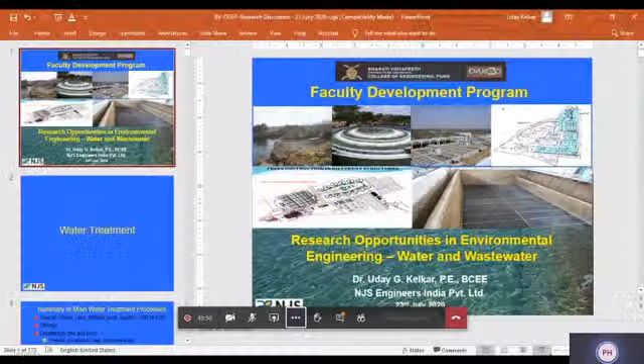Essentially, I want to focus on two sides: water first, then wastewater, and then focus on different aspects of water - the design, the issues that can lead to a variety of processes - and then what's out there for wastewater treatment systems.

What we need to look at is how we, as engineers and researchers, have come up with some of our projects and what future tasks we need to consider. Some slides you might see have come from textbooks or from my interactions - if they're not relevant we'll skip them and go more into detail.

What you see on the first screen is basically a water reservoir on the left-hand corner, then a cascade aerator and treatment plant. On the right-hand side you see the design of a plant.

I'll talk about that soon, but it's quite an interesting project where doing research together with the contractor was really beneficial. The slide at the bottom is a brand new plant we are building as engineer and designer, which Suez is constructing.

This is going to be the largest plant in India, or maybe Southeast Asia, at 564,000 cubic meters per day. This plant is in Delhi.

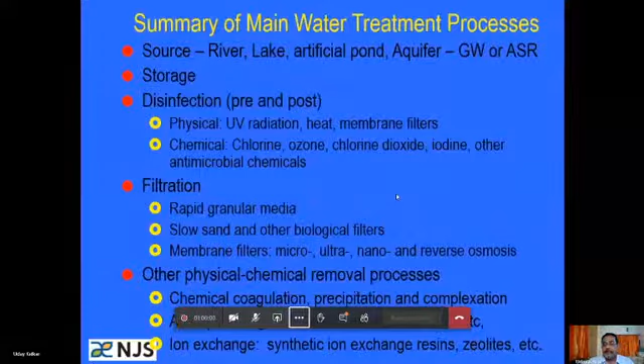I'm going to skip this because it's a standard slide.

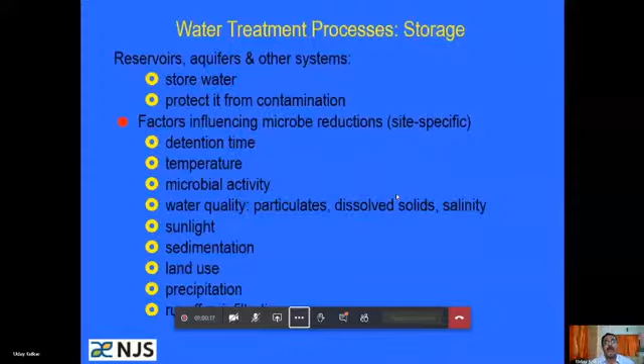Because of that, a good amount of residence time was created within this reservoir. At the intake location for this large 500 MLD plant, or 500,000 cubic meters per day plant, the actual water quality coming into the intake was much more superior.

What happened was, because of reduced operations, reduced chemical usage, and reduced disinfection, this particular reservoir, which they had land available for, started being used as a toning reservoir. That attenuation reduced the incoming turbidity, TOC or total organic carbon, and other contaminants.

In the next step, when the new project started, they wanted to go directly to the canal rather than into the lake they had created. Because of this assessment, they had to research the water quality and substantially change the treatment processes, treatment units, and operation and maintenance, because what existed earlier was no longer going to be there. So that's a change in water quality.

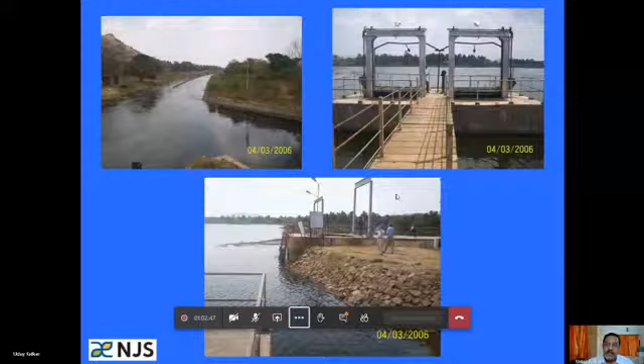So this all happened based on the research that we did in the systems. You could also do these researches. The systems that need to be looked at are the carbon, nitrogen, and carbon phosphorus transforms, leachings from the sediments, and aeration of the sediments, and so forth.

Here's the data that we did, relation between the COD nutrients and the data from the study that we did for one of the plants - total nitrogen, total phosphorus, and limiting nutrient needed to be found out based on the treatment process. You still can continue to look at it.

There is a lot of work that has been done on limnology, and they still continue to do it. And based on now, the relationship between total phosphorus and carbon, total phosphorus and total organic carbon, molecular size reduction and molecular size changes within the nitrogen and carbon, and so forth.

Every lake, every system is different, so one size may not be able to fit all. What you can get is an idea to look at it, where to search, but your solution will be unique for your own processes. Here's the research that we did from the bottom of the sediment on one of our projects.

I'm fortunate that I do get involved in technical design engineering, even at this stage, and also in some research with universities that we jointly do. So I guess it keeps my brain cells active so that in case I'm retired, I can go and do other teaching and anything else. That's just a side note.

So this is what can also be looked at for the limnological side of the way of considering what needs to be researched on the side of water and augmentation systems.

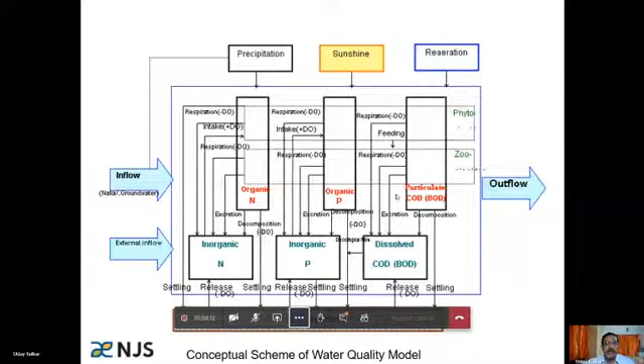And we had to do this. We had to analyze and do speciation of the combination between iron and manganese, and also TOC and so forth.

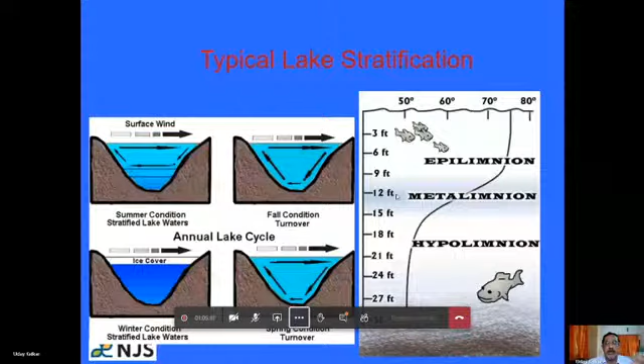So this is when finally an aeration was conducted and designed so that during stratification, if you apply a certain amount of air into the process, it will provide oxidation to the hypolimnetic and metalimnetic water layers, and basically not stratify the lake, essentially increasing the water quality in the process.

There are different types of aerators. This is one we used in Hyderabad, in Lake Hussain Sagar, for developing these - reducing the stratification and also reducing the applied slug of nitrogen and phosphorus coming from the sediments, which were found to be highly anaerobic in nature.

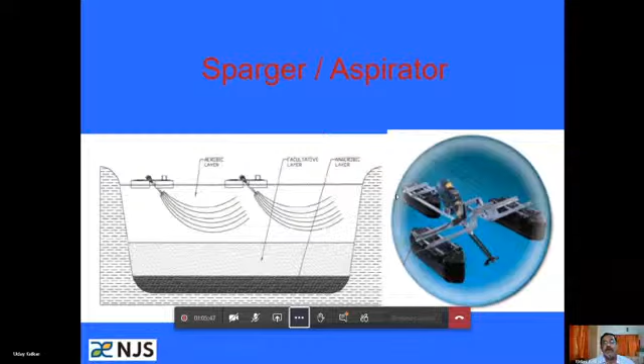I think in Gujarat, and also Baroda and Ahmedabad, they have used this for a similar type of lake restoration. There's another one sometimes people have done in Nainital and other places, where you can put an aeration system through a linkage of pipe and simple air conduits at the bottom, or membranes at the bottom, to have an aeration.

Essentially, it just brings the water up and down and changes it from your limnetic condition to non-limnetic, changes the stratification into normal air mixing. It doesn't disturb your flows or your water levels at all. And it's got an idea that it can go up and down in height.

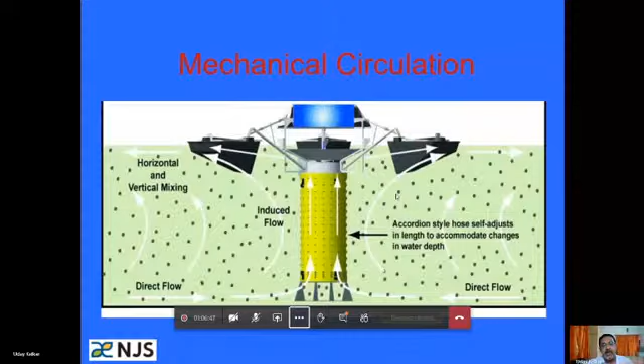So if the limnetic conditions are in the case of hypolimnion, and the lower side of the waters are deeper, you can essentially increase the length of it, if you look at it on the left-hand side.

They have used it, and we actually went and visited this at Lake Warragamba Dam in Australia, where if you look at it, these were solar powered. The same system was on solar power, where the solar power was providing enough energy - less than, I think, 5 kW or 2 kW range pump systems.

What they were having was a lot of water coming from non-point source pollution into Warragamba Dam, a lake being used as a reservoir for water supply to the city of Sydney. Because of this non-point source pollution, they were seeing algal growth in blooms during certain times of the summer.

That was creating a lot of problems in the treatment plants downstream used for the city of Sydney. If you've worked on these plants, you know that when algae comes, it has long chain species. You need to have oxidation, otherwise if you add a coagulant up front, it will just wind up into the process, everything will float, and create a messy system. It will never settle down.

So by doing aeration with the solar-activated panels, they were able to reduce a considerable amount of algal blooms coming into the plant and save costs.

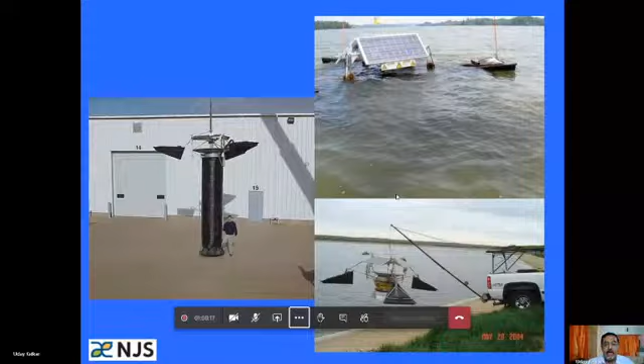So this is a process. This is just your standard conventional plant, as I talked about. We talked about the physical process. I'm going to skip some of this.

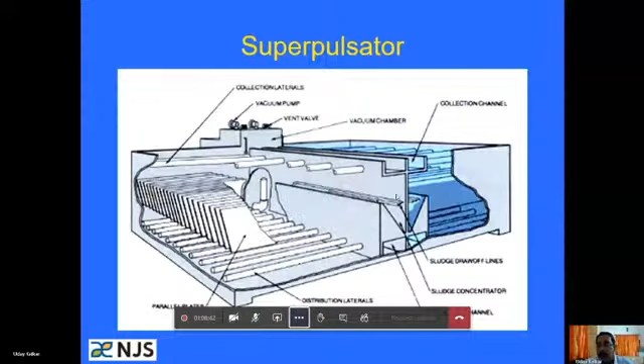Can you hear me? Yes sir. Okay, because that's another issue we have with the connection speed we were at. Now I'm getting connected again, I have to redo this. Just now? Hello? Yes, hello sir. Yes sir, you are audible. Okay, great.

So then talking about this, another problem I also do research on is called Actiflo. Actiflo is a solid contact settlement process. It was kind of unique in that if you add very small particles that act like a seed.

Sitting into your treatment plant, it actually reduces the footprint of your sedimentation basin. We did this pilot first when I was in the US, and we tried to do it here in India, but the cost was substantially higher to begin with.

But essentially, it's not a new seeding process. You might remember that at times people used to add a small amount of sand particles, or small amount of soil particles, to the treatment process for coagulation. That's exactly what this was, Actiflo given a brand new name by US Filter at the time.

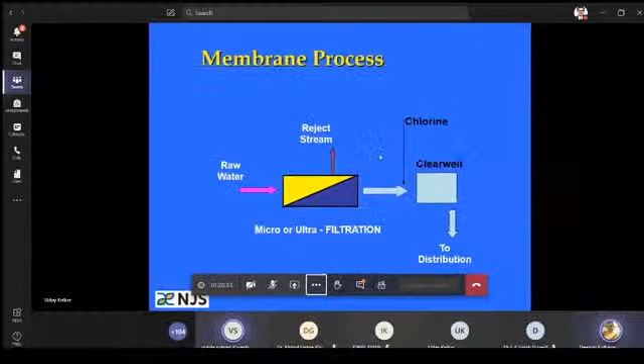Yes sir. There is some disturbance, I'm getting a motorcycle noise. Can you hear now? Okay.

Then the second point is desalination, where you're using systems across osmotic pressure and reverse osmosis.

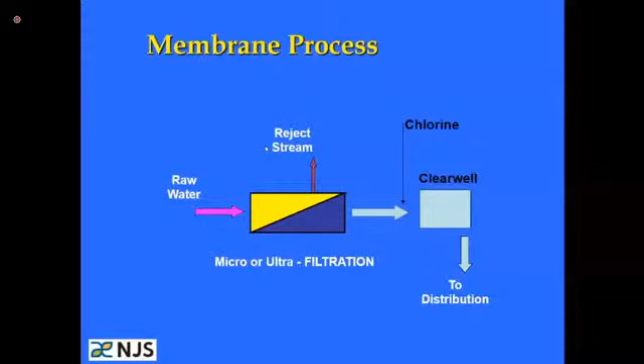Wow, okay, thank you, sir. Oh, okay.

Now I want to talk about desalination, where basically you use the reverse osmosis process, RO. If you look at the earlier slide, the last one is the desalination or RO process.

There's a lot of work now on the normal process in trees, where roots go down and take up water through osmotic pressure, for example a coconut tree taking water from the bottom of the soil. The other way around, what we do in membranes is use reverse pressure so that the salt is retained and the water is cleaned.

But it's a very costly process. It requires high pressure pumps and high osmotic pressure. The recoveries are not more than 50%.

So new research is happening in terms of what is called forward osmosis. What we are used to doing nowadays is reverse osmosis, putting a reverse pressure and trying to separate out salt and the water content. Now FO has been developed, but not yet to the point that it can be used for conventional drinking water.

It's being used a little on the industrial side. The issue is you need to use a chemical, for example ethylene glycol or something of that nature, to separate the salt and the water content. It's still being formed, not completely finished in the process.

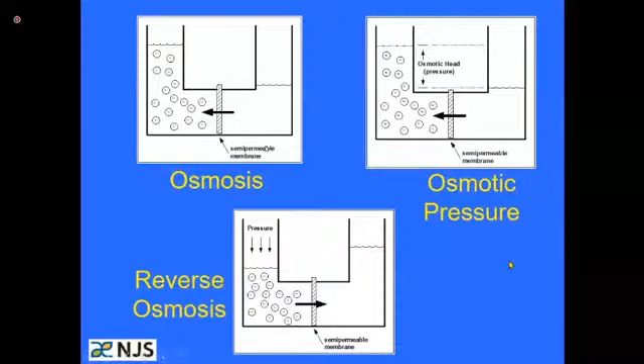Another point of research is energy generation within the RO process, because in seawater desalination your recovery is only about 50% or 45% in actuality. You use a lot of energy and have a lot of waste energy going in. You need to recover that energy so substantial energy can be recovered through the process. There's a lot of research happening here, you could look into that in the systems.

Another type of research is the use of bathymetry in dispersion and disposal of the reject, as well as the intake, because you don't want to put the reject and the intake at the same location or in close proximity to each other. Otherwise you'll be in a circular system where your plant will essentially fail, because you're putting dirty water back into the intake location and the intake is pulling it into the process. So you can do mathematical modeling of the systems to determine where your intake and discharge points will be, and how dispersion is going to happen within the seawater.

What is the strength of dispersion? What are the waves and patterns in the area that need to be accounted for? And we do this in large scale plants.

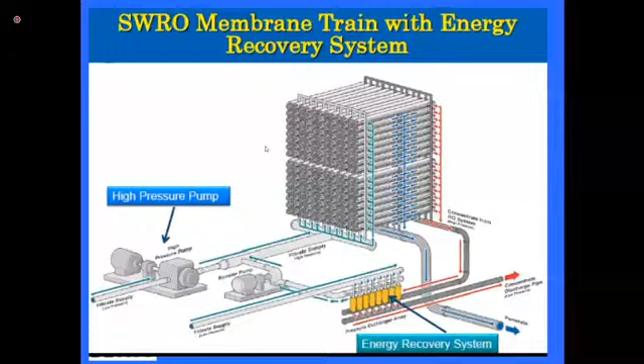We're actually doing this, or going to do this, in one of the largest plants in India. It's under the design stage right now for Chennai Metro, which is basically a 400 MLD product water plant. The intake line will carry almost 900 MLD capacity water for desalination, to the tune of 30,000 to 35,000 milligrams per liter of solids or salt.

Here's an example of why we need to look at research and the thought process. This is data from a plant in the same area showing influent and effluent TOC, total organic carbon. We suspect there is an issue with how TOC is analyzed, whether it's analyzed in actuality using a TOC analyzer, like a Shimadzu, or using a COD analysis and converting COD into organic carbon. That's why you're not seeing any change between the inlet wastewater and outlet.

So this is another way of looking at desalination. Why? Because if the amount of contaminants, for example TOC, total organic carbon, is not reduced, then you have higher fouling characteristics of the RO membrane. It may be anybody's membrane - it could be DuPont's, it could be Nitto Denko's.

But essentially, RO fouling will be a substantial issue. And if RO fouls faster, you're increasing the changeover of RO membranes, which increases the cost. So this all boils down to cost and operational issues.

I just threw in this slide to give you an idea how the cost of RO systems works. Typically power is 26%, which is the highest in the operation process. Construction is 31%, but that's spread over the number of years of the plant. Pre-treatment, intake, and discharge are also there. In operation, 15 to 30% is O&M cost, 35% power, and 40% is capex and indirect cost.

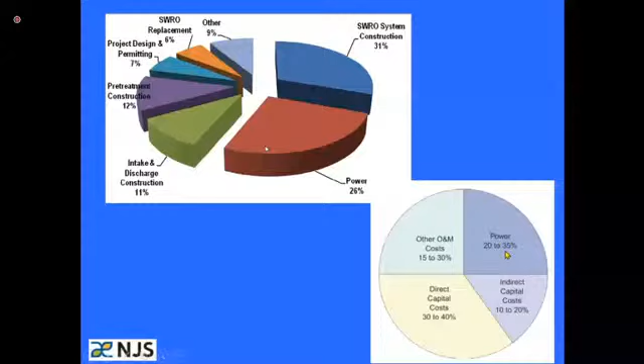I'm going to talk about the third portion, which is disinfection. We're interested in disinfecting the water for use, whether it's recycled water or treated wastewater getting discharged into the lake, the river, or anywhere else. I'm going to start adding in the viruses, coronavirus, or any other viruses that exist or would exist in the future.

Here's an example of THM, trihalomethane formation potential. You can use coagulation, clarification, or enhanced coagulation. One of my PhD work was looking at enhanced coagulation at different systems, dosages, and sizes of TOC during my early master's and PhD level. Essentially, you could reach an asymptotic condition where no matter how much coagulant or change of systems you do, you won't remove any more additional TOC or organic carbon coming in. So essentially you've reached the point of no return.

You've got to do something different to reduce THM formation. Chlorine is obviously used as a primary disinfectant, but it adds trihalomethane formations or trihaloacetic acid formations. If you consider ozone as one of the options, ozone converts not only bromide to bromate, and bromate gives you dibromo chloro, because chlorine is still used as a secondary disinfectant. So you get dibromo chloro, bromochloro, and combinations thereof. Also, ozone converts acetic acids from your TOC, so you get haloacetic acid, halo organics, and halo halides.

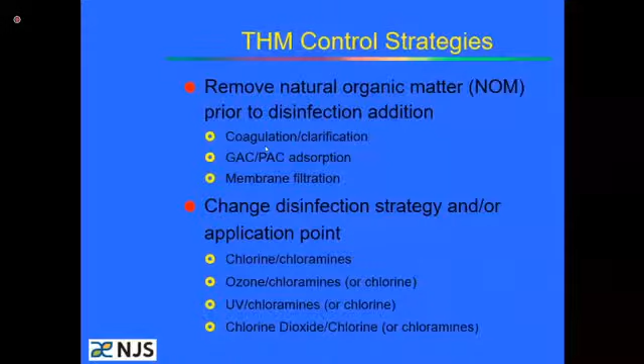Secondly, it also has some issue with bromine and iodine in the water. If you have iodine and bromine coming into your raw water, it will convert iodine into iodide, and it will give you pink water. This happened to us when we were operating a plant and didn't notice how much chlorine dioxide dose we were putting in. Accidentally the dose went up to 2 milligrams per liter, and boom—next day everything was pink in the system.

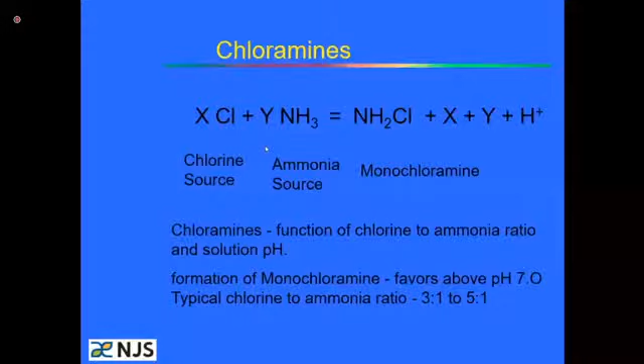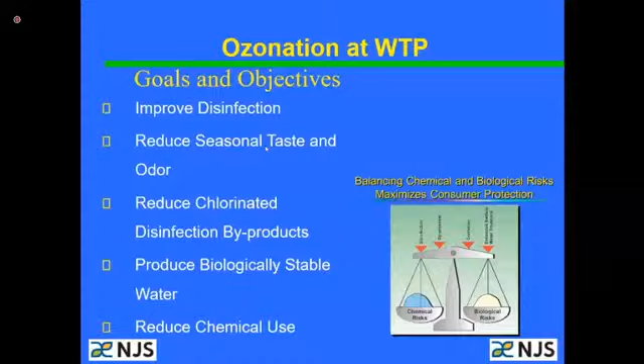Hello sir, yes sir. Is it necessary to change the slide? I see the reverse osmosis slide in front of on the screen. No sir, you have to share the slides so we can understand what you speak. Sir, slide change hota hai. There is a delay in slide change that I can see. Right now, sir, almost slide change hoto, sir. If you don't have it, just tell me, I'll stay longer on that slide. It may be possible that I'm talking about the next slide and you're getting an earlier slide in front of you - that's possible. So just let me know, I'm here to help. Okay sir, no problem, thank you.

Now I want to talk a little bit about ozone. Keep in mind, chlorine can be brought as a gas, stored in cylinders and applied. Chlorine can also be brought as a liquid, as hypochlorite. Again, you need to consider what level of hypochlorite you're going to bring - 10%, 15% solution, or combinations between 10 to 15%. Because the longer the chlorine solution as hypochlorite stays in your silos or holding tank, it will create an issue of chlorate-chlorite formation and degrade. It will change your dosage requirement, because your pumps will be designed based on the percentage of hypochlorite solution you're going to use. This is especially true in areas with large temperature variation between day and night, especially in summers - Rajasthan and Delhi are classic examples, with very high daytime temperatures that could create chlorate-chlorite issues. In moderate temperatures, there's no variation issue with using chlorine.

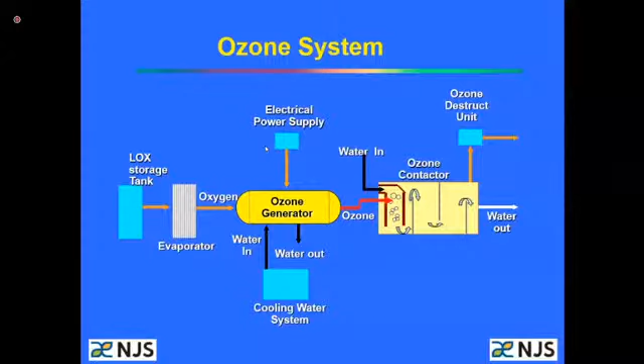So ozone looks beautiful, wonderful, lovely, but it has its own things that need to be looked at and considered. Here's a slide I'll show you - we can talk later in detail if somebody wants more analysis. You can look at your ozone percentage area, what percent ozone by weight you can get, what amount of energy is required, and how the combination needs to be considered in your system.

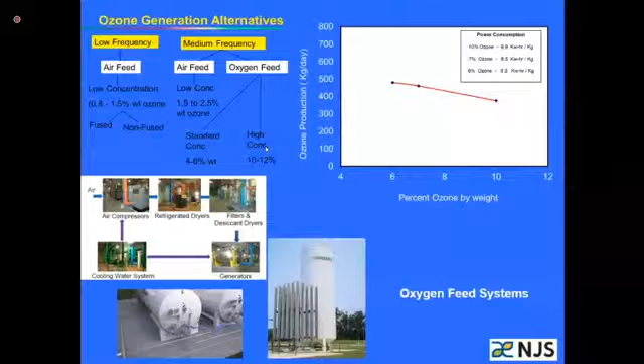Here's a slide showing ozone generation. Essentially, oxygen goes in, you have a high electric discharge into ceramic tubes or ceramic sheets, and then an electrode that sparks. If you go to Google and search ozone generator, you'll see a typical slide like this, but it'll also show a blue color arc around these little holes - that's the corona formation due to energy being sent and ozone being generated in the process.

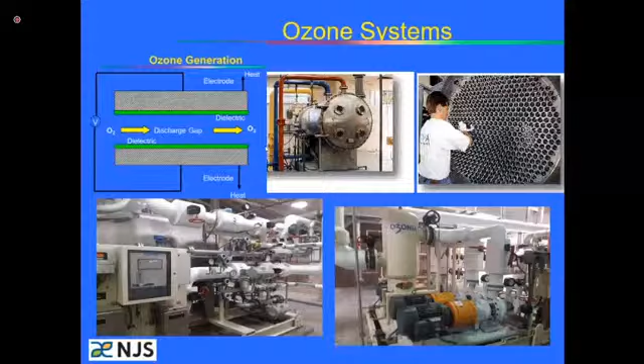Once the ozone is generated, it needs a formation to dissolve back into the water. It's got a standard bubble-type dome system. You could design it - something I was involved in when working with CDM Smith. One of my colleagues, Chris Schultz, developed what's called SVIDT, side stream virtual impact venturimeter, which basically injects here and then goes through the process. It was quite research-heavy work we did jointly with AwwaRF and CDM Smith - there's an opportunity to do that.

As I said, ozone could be used as a primary oxidant. Then you need to look at what to do with your filtration, or ozone could be used post coagulation-flocculation. You need to do work specific to your own water quality and client, because if you have very high organics, large molecular weight compounds, iron, manganese and other organic mixtures, they'll use a lot of ozone up front - a dose going from 3 to 5 milligrams per liter.

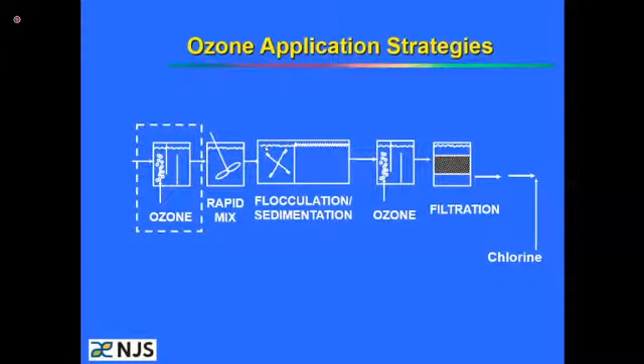But instead, if you use good coagulation processes, enhanced coagulation, remove the organics as much as possible, give better quality water coming into the ozone plant, then you could reduce your ozone dose to about 1 to 2 milligrams per liter - substantially reducing your unit size, operating cost, and system costs, and use that savings downstream. But there are plants where primary ozone is a must, because the quality isn't necessarily that bad, and you can use ozone as a primary disinfectant.

Here's a new process I just got word of from my ex-colleagues about what they're trying to do. Nowadays there's a lot of talk within India, and maybe elsewhere, that the water quality coming from the treatment plant is absolutely great within the GLR. However, when you collect water within the distribution system, they're seeing a lot of variation in microbial contaminant concentrations as well as other byproducts. So what these guys are doing now is using small dosages of ozone to clean up the distribution system.

You can do that with flushing, but flushing takes a lot of water, and you're wasting that water. So now they're looking at using ozone in a modular cart, putting it on a tractor trailer, going into the distribution system and cleaning up. It's a much better way. There's a lot of data available now, and there's an AWWA publication on this too, in terms of distribution system water quality, because that's the issue coming up in India nowadays.

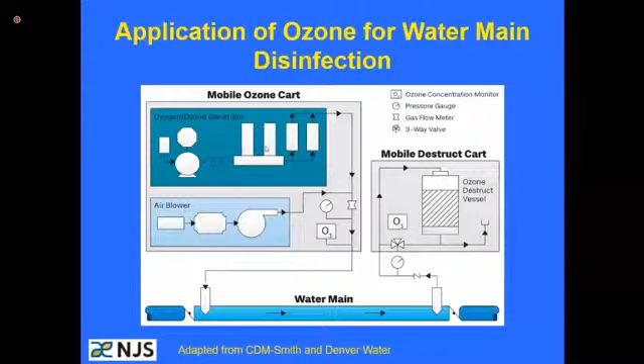But I want to clarify up front that UV, like any other oxidant, does not kill the microbe or the species. It just neutralizes it - basically changes its DNA and its reproductive capacity. If the microbe can't reproduce, it can't infect. That's the premise here. So UV disinfection attacks the DNA process so they can't reproduce. If they can't reproduce, they're non-infectious and can go out - still alive, but non-infectious. I believe that's what's happening with a lot of research now using UV for disinfection against coronavirus in air systems, or on surfaces infected with coronavirus, putting a UV lamp across it.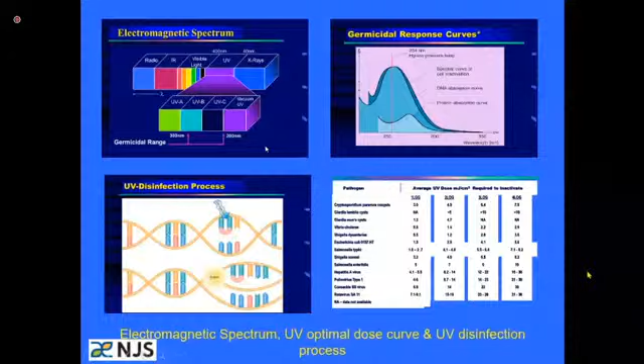The next slide shows work I did for my own research, and also in a lot of plants. There are two types of UV you can use - UV in pipe, or UV in trenches - depending on the application, the space limitations, and so forth. Most of the time on the wastewater side, you use UV in trenches because it's easier and hydraulically controllable. You can install or remove the UV lamp, and accessibility is much easier for an operator.

But for a water plant, you can consider an in-pipe system where you connect the UV to either an individual filter pipeline or a combined pipeline where water from different filters comes together. You need to give enough space for the operator, because they need to change the UV bulbs fitted in there. For example, with an in-pipe system, you need space for the operator at the flange, and enough distance between that flange and the one connecting to your pipe, so removal isn't hindered.

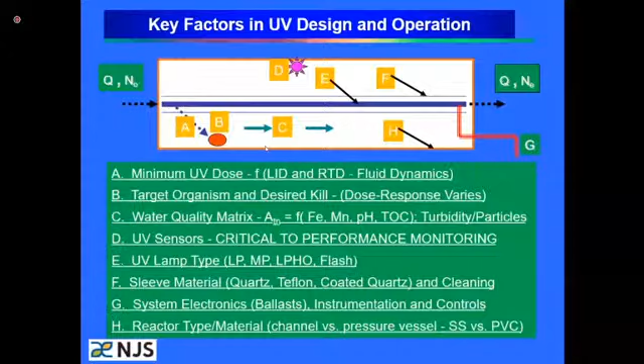You can have different measurements for UV. There's a lot of research happening on this - how do you do it, which type of systems you use, what type of surrogate organisms to use. For example, MS2 coliphage is being used many times for viruses. There might be a surrogate that will come for a coronavirus, SARS-CoV-2, or maybe SARS-CoV-1 that is already there. There are other pathogens we can look at as a substitute, so you don't have to actually work with the actual pathogen, but it can give you a similar reduction or reaction with respect to the dose response curve, the type of dose, detention times, and so forth.

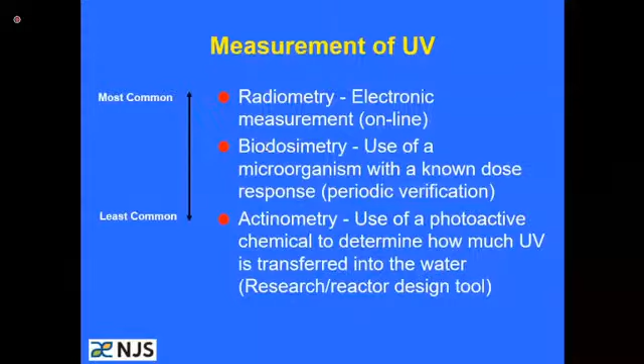The plant in Okhla, that is the Delhi Jal Board's plant, will have the largest UV in India, which is 564 MLD, or 564,000 meter cube per day design plant.

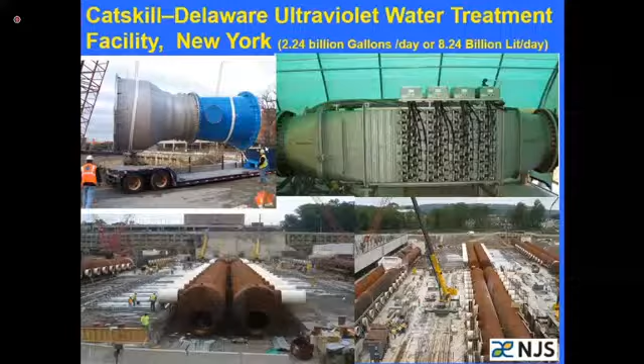Now I've done with the water side. On the wastewater side, I will rather skip some of the slides because time-wise I think I have to finish up by 12 o'clock to have a 12:30 interaction.

What I would like to start with is this particular slide, this is the crux of the entire unit operation of the wastewater side. The top side, which is suspended growth, attached growth, submerged attached growth, all are ASR processes, aerobic processes, which are basically energy consumers. They need energy, they need aeration, they need oxygen to feed and operate. At the bottom side is your anaerobic processes, which are both suspended as well as attached growth.

The classic example of that will be your UASB, upflow anaerobic sludge blanket reactors, or your digester, mesophilic, thermophilic, or combinations thereof, so that you can digest the sludge and reduce the organics. The VFAs will be reduced substantially, the organic content substantially reduced, and it could be used to produce energy. So a lot of work was initially happening on aerobic, and it is still there - that is still the basics for removal of your nitrogen, phosphorus, BOD, and TSS, substantially still using aerobic processes.

Nowadays, a combination of treatment processes between aerobic and anaerobic has started to work very significantly in the last 20 or 30 years, because you want energy consumed on one side, but energy is getting costlier, so you need to find better sources of energy other than conventional ones, and utilize that for your wastewater plant, since wastewater is required to be treated and processed.

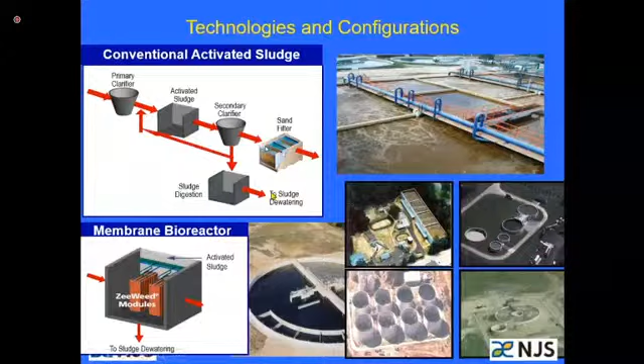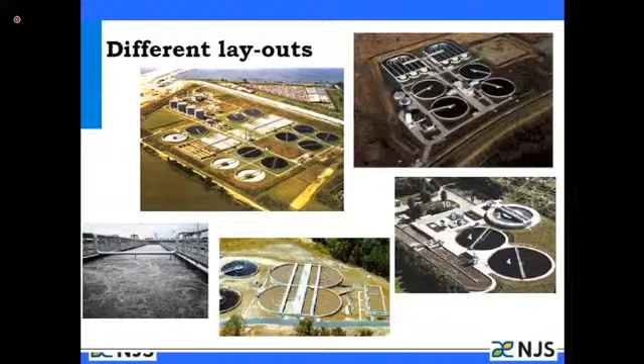On the membrane side, I think the slide was misplaced, but essentially this is what I was talking about - you have dirty water outside. There are a couple of membrane configurations: inside out, where dirty water goes in and clean water comes out, or outside in, where clean water comes from the center and dirty water is outside. Depending on the application and membrane manufacturer, there are different configurations.

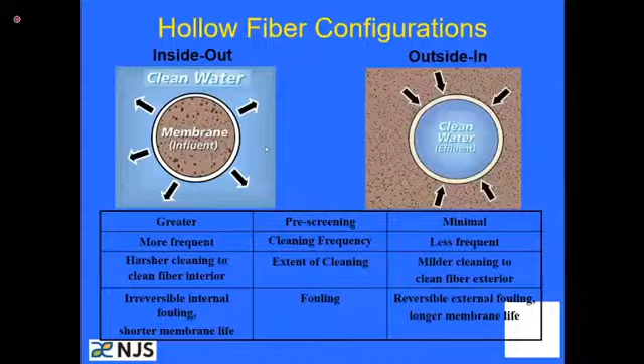What are the new trends in environmental regulations and where do research needs lie? We have regulations on nutrients and odor. There will be issues with BOD incoming, the ratio between BOD and COD, the ratio between types of COD and BOD, particulate versus non-particulate combinations, and nutrients - what organic nitrogen is substantially coming in, especially in certain parts of the countries, from industrial effluents or effluents from a small shop that don't have combined industrial treatment plants. This can unbalance your operation, unbalance your microbial conditions, and basically belly up the plant. That needs to be looked at.

As I said, energy cost to operate, sludge disposal, chemical and freshwater prices are increasing. To bring water to the cities, people might have to go 100 or 200 kilometers. Take the classical example of Hyderabad, Bangalore, and various other places where they're bringing water with 4-stage pumping, 5-stage pumping, 400-meter head, 100 to 200 kilometers distances. So we need to have that thought process going.

To give you an idea on wastewater, why we need a new thought process, a new paradigm shift, in electrical - the maximum amount of energy you utilize, as I said, these are energy consumers in aerobic processes, is above 50%. The rest is in different parts of the area, but that's the largest.

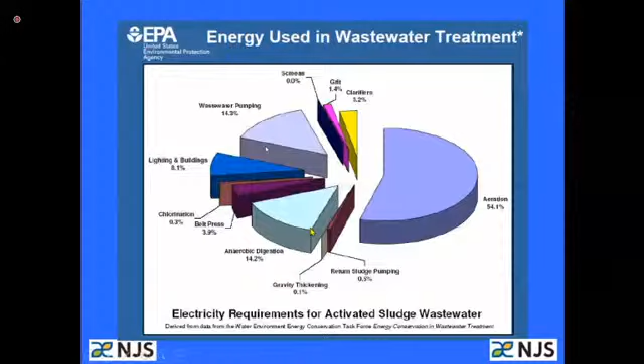Here's a slide I've put together - I think Nicholas Apostolidis has done the work. Essentially, different slides show that the primary has a smaller amount of energy requirement, which increases as the amount of processes and discharge standards change and the unit operations change. You basically get a substantial increase in energy.

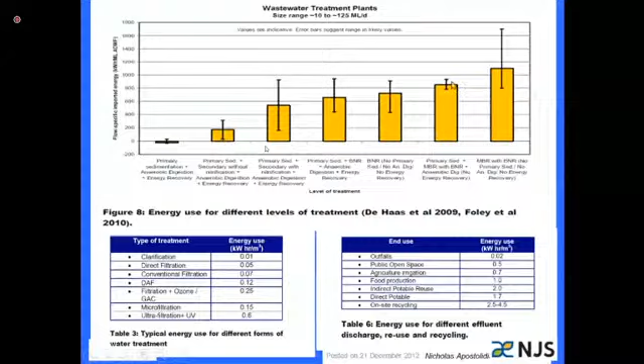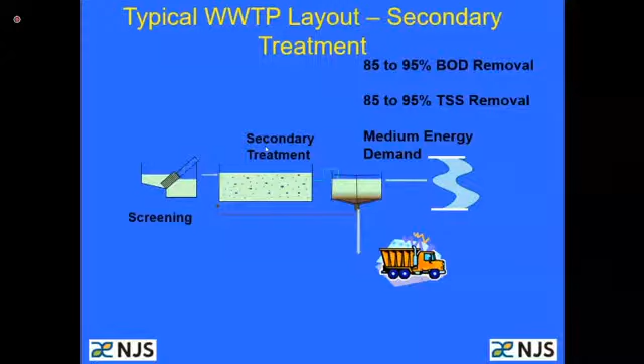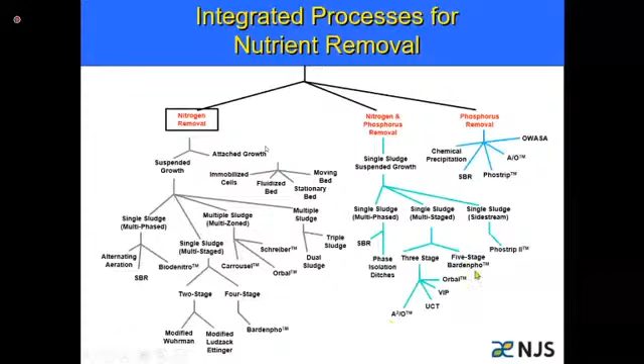The first plant in India was built by us doing the research and finding out what's required and how to do it, for the Hussain Sagar Lake plant from 2007 through 2011 - a 30 MLD or 30,000 cubic meter per day and a 20,000 cubic meter per day plant, where the plant was discharging into Hussain Sagar Lake, and the lake was nitrogen limited. The sediments were creating a lot of nitrogen into the process, and we wanted to limit nitrogen as well as phosphorus to about 0.5 milligram per liter.

Essentially, we could have looked at phosphorus removal as chemical coagulant removal, because phosphorus can be easily removed through ferric chloride or alum with different doses. Ferric requires a lower dose, alum requires a higher dose, and so on. But it generates a very high amount of solids, and you need to treat the solids later on. So we thought, why not use a biological nutrient removal system combination.

This is one of the processes, called the A2O process. Essentially, A2O stands for anaerobic, anoxic, oxic - aerobic process. Anaerobic means you don't have oxygen at all, devoid of oxygen, zero. Anoxic means you have a small degree of oxygen available. And then aerobic - this is your nitrification and denitrification stage.

UCT, as I said, is just a combination of how you pump water back from one tank to another. If you look at this, you'll have nitrate and nitrogen that have been disintegrated, and bringing it back here can affect your nitrite, which can also affect your phosphorus. So that's the reason how you operate it changes the process, but essentially it remains the same. We did bench scale tests.

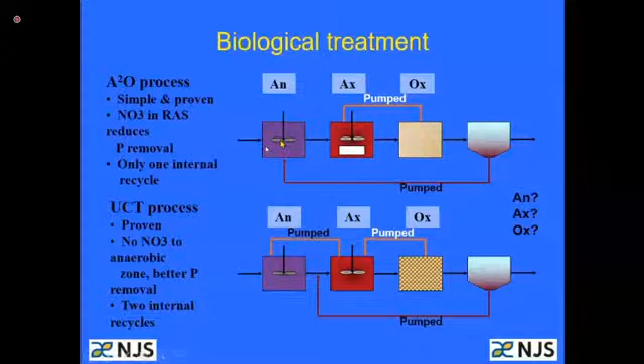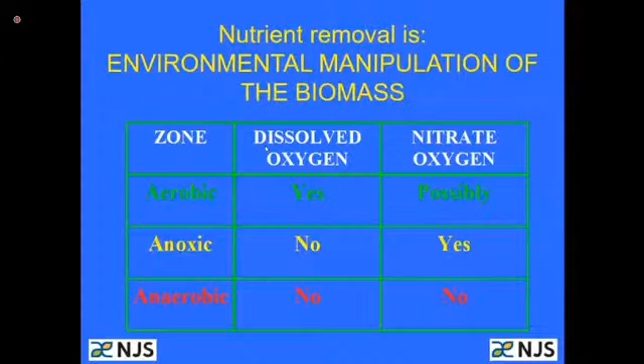How do you determine whether there's oxygen or no oxygen? You just take your meters, basically oximeters, and measure the oxygen there. If you have a negative number, then there's no oxygen at all. If you have a slight positive, then there's some oxygen, and a high reading means you're in an aerobic process, and so forth. I'm going to skip some of these slides.

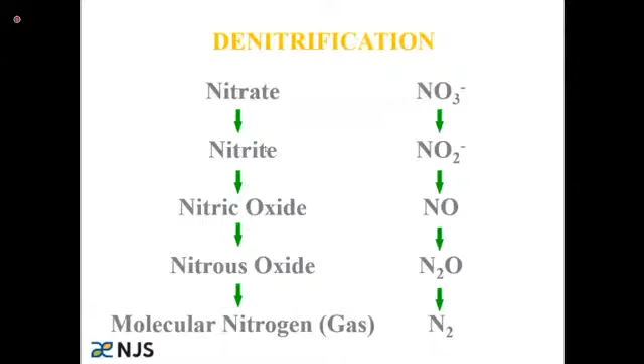As I said, this is the stoichiometry - essentially, you need about 4.6 grams of oxygen per gram or milligram. The alkalinity is consumed during nitrification, and if your wastewater has very low alkalinity, it may be required to add a certain amount of alkalinity so you won't have acidic water going out. I'm going to skip some of these slides because they're a bit more detailed. This is denitrification.

On the stoichiometry side, you have about 2.9 grams of oxygen removed, 2.5 grams of methanol required, depending upon whether you are limited in terms of food. Methanol is essentially carbon—you're putting carbon into the process so it doesn't get deprived of carbon, and this allows denitrification conversion of NO3 to N2, nitrite to N2.

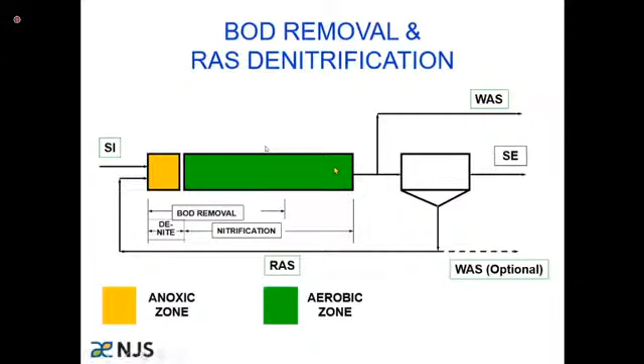But what if you want to convert this to a BNR plant, which we did for a 20,000 cubic meter per day, or 20 MLD, plant? Let me slide down a little. Essentially what we did is create another zone that became an anaerobic zone, and operated it such that the wastewater coming in is reduced before entering the oxygen system.

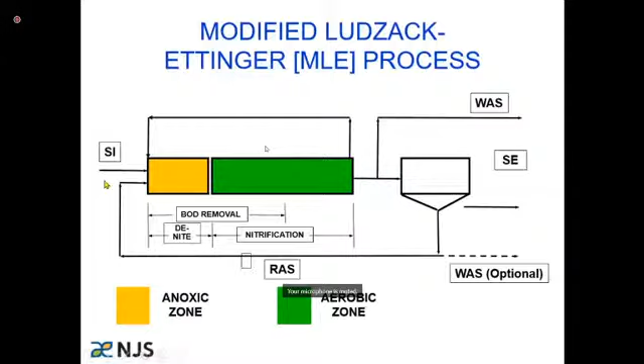In a BNR process, what you'll always find—and it's quite interesting for a lot of people to see—is suddenly a slug of phosphorus coming up. If your wastewater is coming in from left to right, this is your anaerobic zone, where phosphorus release starts happening, or phosphorus comes out. That's why, if you analyze influent phosphorus—say it's 4 milligrams per liter—at the tail end of the anaerobic process you'll see a lot more phosphorus than your influent.

And suddenly, if you don't have an idea, you'll start wondering, what is happening? Why is my phosphorus increasing? It's because during the anaerobic process, phosphorus is released from the cell mass back into the liquid, and that's why you see it higher.

I'll explain how phosphorus is removed, because many people don't understand that mechanism. I've tried to show it graphically here. If this is a cell body with phosphorus and stored fatty acids, this is a PAO or PRB—phosphorus removing bacteria.

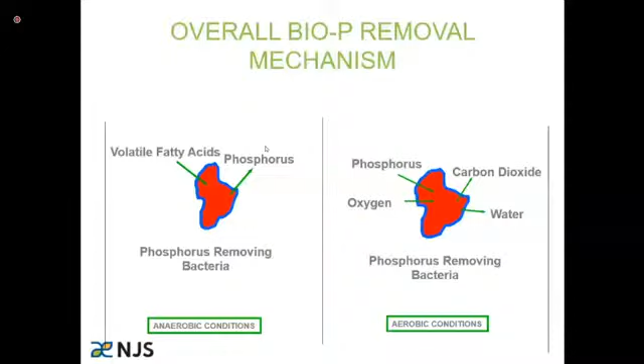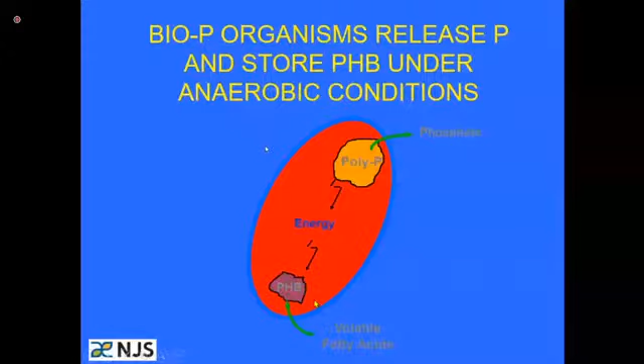Here's the classic example I wanted to show—this is BioP. This energy uses polyphosphates and PHB, volatile fatty acids, in the system. In anaerobic conditions, this is released, and it's used as energy and then for metabolism.

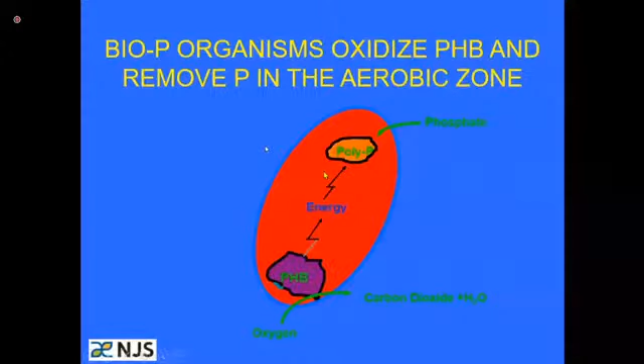Change in alkalinity: nitrification will consume about 7 milligrams per liter alkalinity as calcium carbonate, and you need sufficient alkalinity going into denitrification, because denite will create alkalinity. So you want sufficient alkalinity coming in so that it doesn't get chewed up in the process.

Here's an issue where you can use standardized data, or use data from your own wastewater plant or research group, for what type of SRT (sludge retention time) and what type of BOD reduction you can get at different temperatures and in different temperature mass regions. This is from the Japan Sewage Works Association, data that we had shared with them.

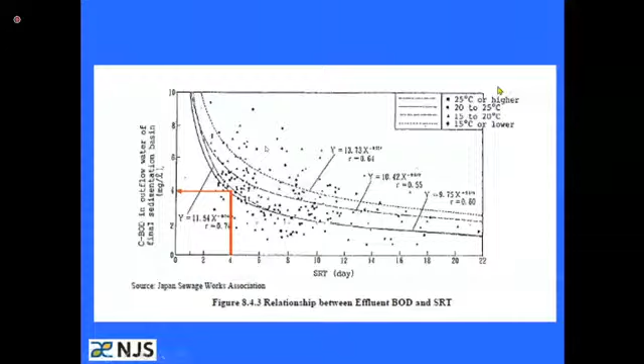The next thing I want to talk about is how do we optimize power in the process. There are different treatment processes coming up. One is called the novel nitrogen removal process. SBR has got a NEREDA process, which is basically a smaller group of granulars that act like anaerobic and aerobic within the system and essentially remove nitrogen. And then there's energy efficient MBRs.

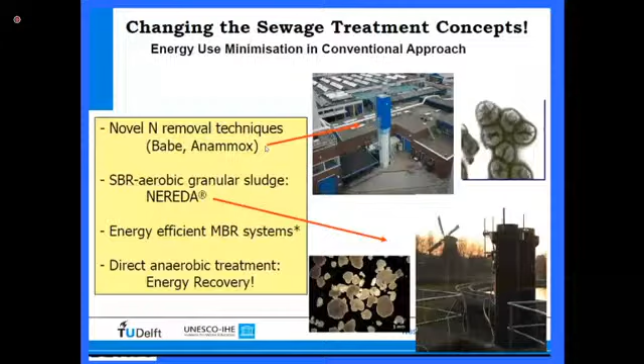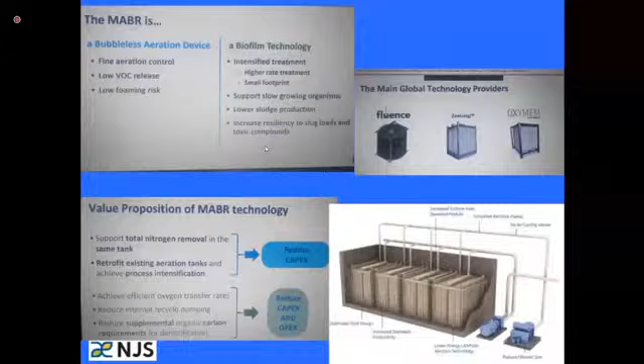Here's the third process, happening in the last 4 or 5 years, called MABR - not an MBR, not a membrane bioreactor, but a membrane aerated bioreactor. People are pushing for this because instead of using diffusers at the bottom of the aeration tank, you could now use membranes from manufacturers like OxyMem and Fluence. I think OxyMem is now DuPont - they bought OxyMem over.

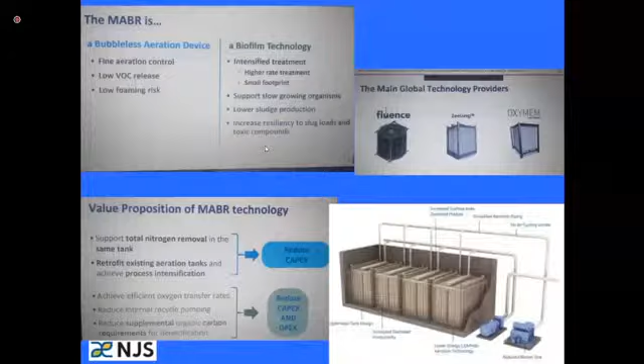Essentially, you use the membrane as a fine bubble diffuser, putting membrane racks into your aeration tanks, so you don't need diffusers at the bottom and don't have to empty the tank to clean them up. You can lift the membranes up and clean them and put them back. The advantage is almost 45 to 50% energy reduction. A very fine bubble is injected into the water, and you get a slime growth on these membranes, acting like a simultaneous nitrification-denitrification process.

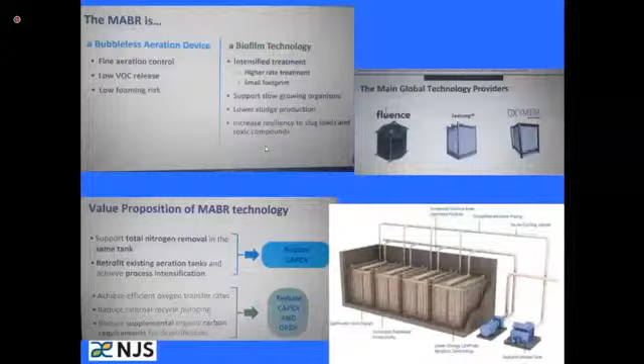We used this concept in a plant in Agra, where the Yamuna water, flowing from Delhi to Agra and downward, was contaminated to secondary wastewater level. Ammonia levels in the river used to run up to 30 to 45 milligrams per liter, BOD up to 30 to 55 milligrams per liter, phosphorus similarly, and so forth. They used to use this water as a raw water source, applying chlorine heavily to try to oxidize all these inorganics, the BODs, the ammonia, and so on.

Their average chlorine dose was about 60 to 80 milligrams per liter for disinfection and oxidation. If you walked into that plant back then, you'd get watery eyes because the effervescence of chlorine was so high, and the chlorinated water looked like yellowish tinted water.

What we thought was, since there's enough carbon coming into the water at secondary level, and enough ammonia, why can't we use an attached growth process - essentially a wastewater-style upfront treatment for a water treatment plant, followed by a membrane as a physical barrier? Would it help? Since it has worked in secondary plants everywhere in the world in creating tertiary plants, we did a pilot for a year of operation, feeding water of different qualities, and it essentially gave water that was absolutely clean.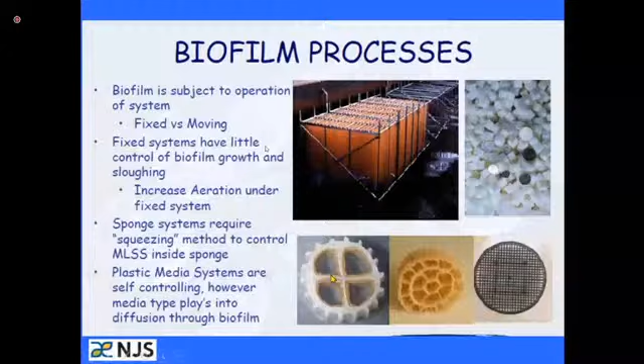Now the water is absolutely drinkable, and I've been happy to say that we received several awards on this, even from Singapore, SIWW, and also from the Government of India, well acknowledged that this was a unique out-of-the-box thinking. So this is another example of research backgrounds, research thinking to be done and considered in the process.

Anybody has time to go to Agra, please do go. This is a plant in Sikandra, just before Agra, about 5-6 kilometers before Agra on the left-hand side. You could see the plant, and it will be interesting to see how wastewater is being treated like a wastewater first and then water second.

This is a Nereda plant. I don't want to go into detail, but essentially you form a granular type of medium and then essentially operate like grain balls in the system.

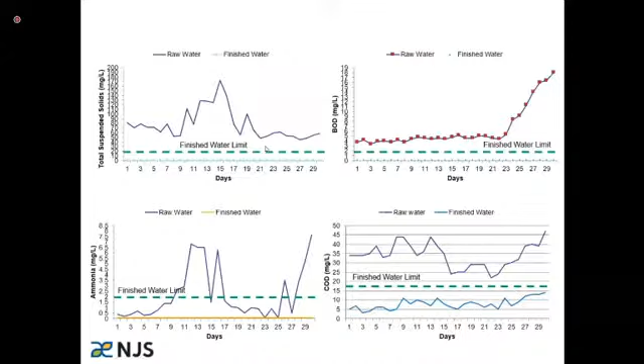The new process that is happening is called Anammox, where if you know that you're going from ammonia to nitrite to nitrate and then back again to nitrogen, this is the process. It requires about 63% less... now it's just cutting short, going from here, and then boom, just going to nitrogen.

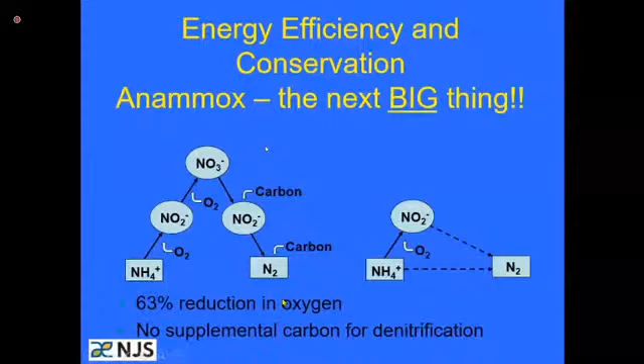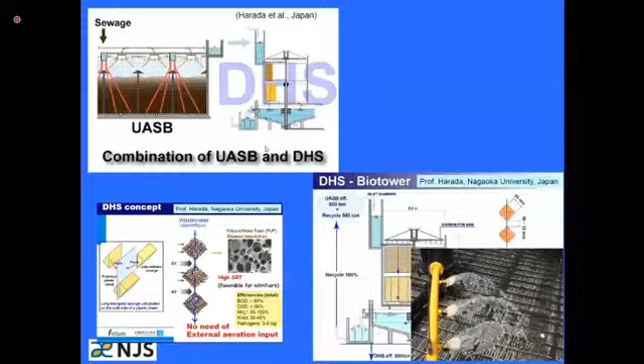These are new research thought processes that are happening. This is again similar to anaerobic sludge issues. This is a UASB mixed with DHS, same idea like MBBRs. Essentially, it's got a media hanging in the sludge or in the water, and then essentially having nitrification and denitrification combined. There's another one called Organica water, essentially using roots to treat the incoming wastewater. But again, you need to have a consistent wastewater coming in, no industrial inputs to have an issue, and then you can essentially reuse the treated water.

The last thing I want to talk about is how water and energy is a nexus. It goes together. You create energy through hydropower, but it also uses energy during the treatment plant process. But now you can give it back, that energy formed in your wastewater, by various processes.

I'm going to skip some of the slides and go only through 4 or 5 because I have a little amount of time left. Electrical energy, nowadays there's a lot of work happening, especially in Europe, Israel, and US, or maybe in Australia to an extent, on the formation of microbial fuel cells. Essentially, we are saying you're using microbes that are using energy through your carbon as a source, and nitrate and nitrite, and they're also creating some energy. Why can't we produce that energy, so it won't be a day far away that you put some grid on top of your aeration system and then generate that energy that can be utilized within the treatment plant.

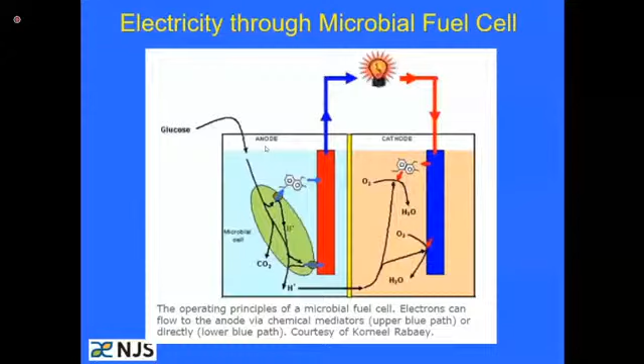Another one is biogas. Generate it from primary treatment, using primary sedimentation, digestion, pressure release, thermal hydrolysis, using higher amounts of energy, or use a combination thereof between FOG - that is fats, oils, and grease waste coming from industry, coming from various hoteliers, various restaurants - mix it with your sludge and use that as a high energy product and create energy from it.

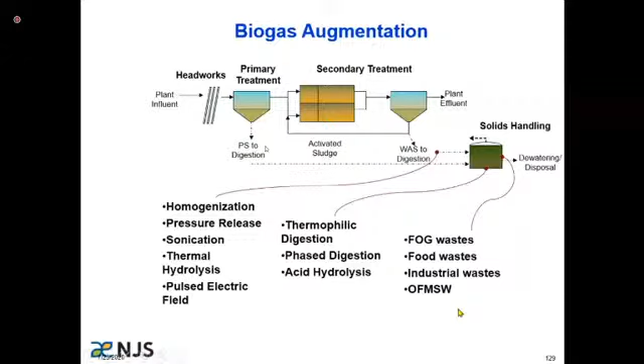This is just a slide showing the same thought process. This is the fog data that's happening right now in some of the places, and this can oxidize. I'm going to go quick with this slide, so don't jump on me. I'm just going to find a slide that I want to talk about.

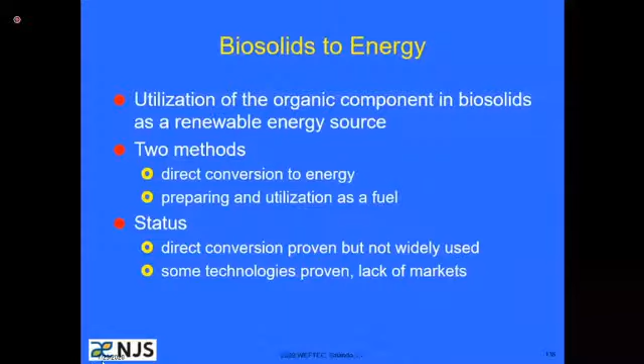You can have the phosphorus going into what is called struvite. If you use a digestion process correctly and then a struviting process—if you've operated the plant, and I am a Class 1 certified plant operator, having operated both water and wastewater plants—if you go to the digester and open a flange close to it, you would see magnesium ammonium in combination with phosphorus. That's struvite. It's a yellowish, dark brownish mixed material that is like a rock at times, so you literally have to take a chisel and a hammer to take it out.

DC Water, the next slide I'll show, is the largest thermal hydrolysis process plant, taking the entire wastewater coming into Washington DC and using THP to hydrolyze the cells and get more energy. But you can also get what is called Class A sludge, which is pathogen-free sludge under USA EPA Part 503 regulation—essentially virus-free, pathogen-free sludge.

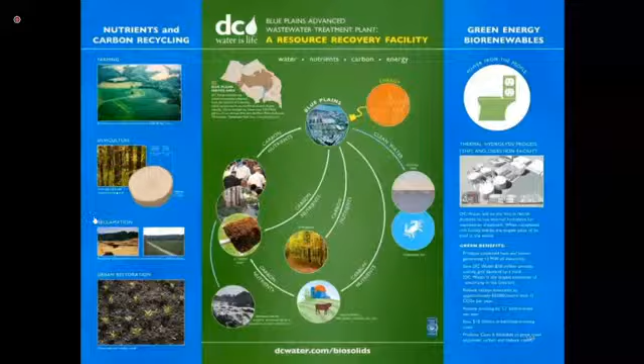I think I've talked about that. Lastly, in about 5 minutes I could finish—essentially you now need to look at the recycle and reuse of wastewater. I've done a lot of work on it; it's my passion, providing reuse in different ways. Technologically, I can tell you that you absolutely have all the technology available at your resource.

But what is not there is public participation. You need a public outreach program, because technologically you can achieve high quality water, but psychologically it should fit into your mind that you're using treated high quality wastewater for drinking or non-potable application. In reality, we all use treated wastewater—somebody else's wastewater flows into the river, comes through a certain amount of time, and is used for a treatment process. But thinking-wise, we need to look at it.

If you look at it, India and a variety of other places are thinking that after 2050 they may not have a sufficient amount of water. So we need to start looking at how to conserve water and how to use this water. We will have sufficient water if we apply it properly and use it wisely by recycling and reusing it for a variety of applications.

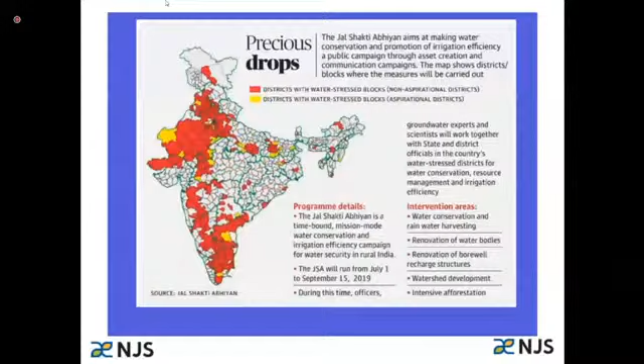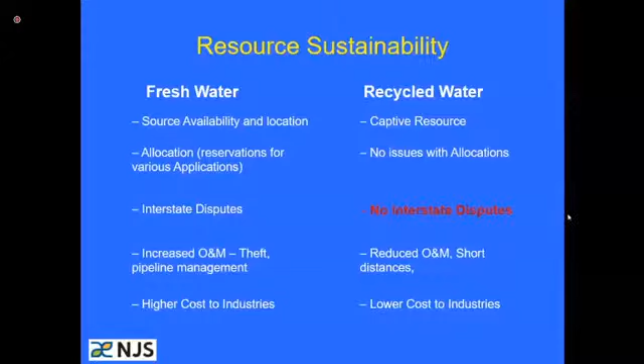If a state, particularly upstream, stops water from a river, there will be disputes. A classic example is the Kaveri River—Karnataka doesn't allow water to go to Chennai or Tamil Nadu, and Tamil Nadu says there's an issue, that more Kaveri water needs to be sent downstream. But wastewater, which is highly treated and reused, has no interstate dispute. The only problem is public perception, awareness, and giving the public full data of what's out there and what the reality is.

The moment you give full data and full disclosure of the information, I think the public will be much more interested in using reused and recycled water. What we want to do is create a brand name for your reused water.

A lot of people talk about how Singapore uses recycled water, gives them a bottle and so forth. I was fortunate to work on that project too. Their prime minister or senior official stood up and said, look, don't get water from Johor Bahru, which is from Malaysia. We'll have no choice but to use this water. And if that is the case, we will have to disclose all the details. We drink this water together.

They're not doing it directly to potable. There are only a few countries doing direct potable reuse. What they did is treat it to high quality, put it into a reservoir with a certain residence time, and then use it for further treatment. I call that reservoir nothing but a psychological barrier reservoir. That changes the mindset, and that needs to happen.

There's only one plant in the world which literally goes from house to sewerage to treatment plant and back to the house tap, and that is in Namibia. Namibia has no water - if they don't do this, they have no water. Very low rainfall, very low. I think Babak is doing that project, or has completed and is operating that plant.

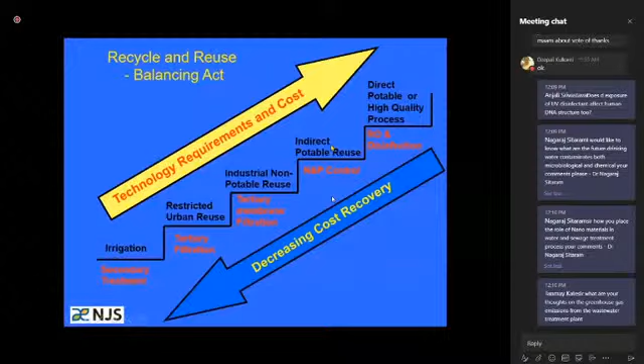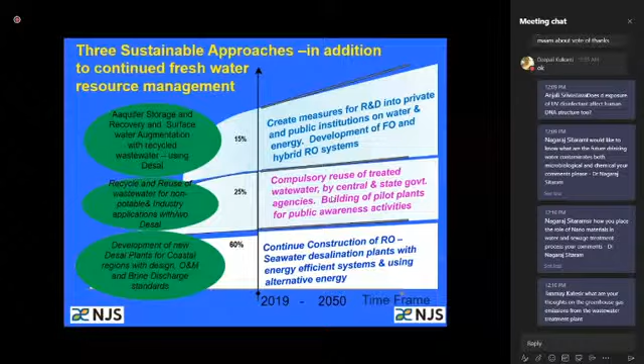Hello? I'm done. Okay, sir. Yes. Sir, okay, let me just share my contact. Here's my contact, I put it in.